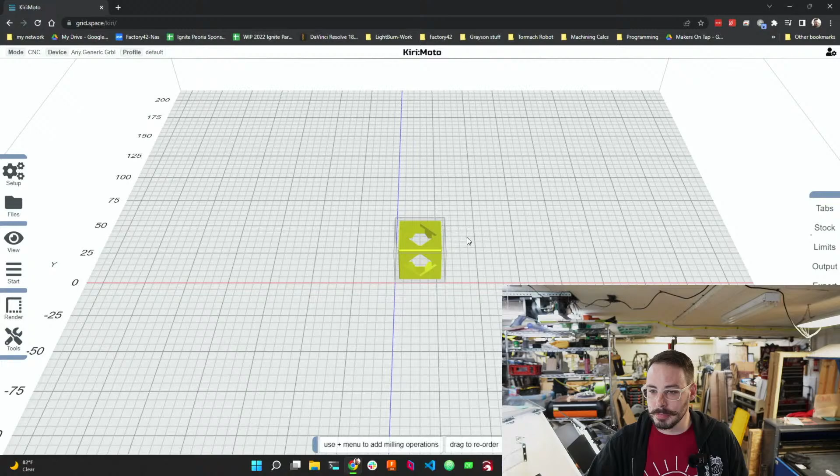I feel like Kiri:Moto is going to be a much faster stream than FreeCAD was. I don't know about you guys, but I don't feel like this one's going to take 3 hours. I hope not.

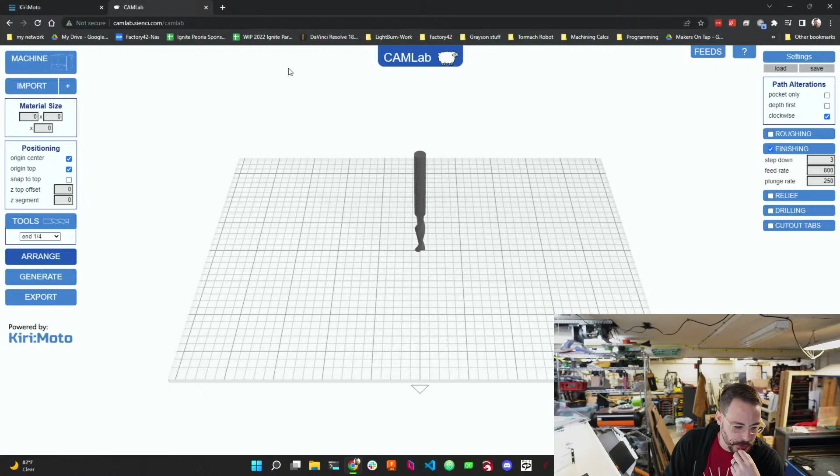Anyway, I feel like that's enough time. Let's go figure out where to start. So let's start in Kiri:Moto. The cool part about Kiri:Moto is it does all kinds of different things, right?

I have used it in the past for 3D printing, for belt printing, and it worked really, really well for that. So, hey John.

So when I first started building the milk crate, I really liked the idea of this cam and slicer software, so people could make all of their milk crate parts in here using the FDM tools, and then make all of their CNC parts in here using the cam tools. But I never got around to trying it out.

So I think we'll use the CNC mode with a generic Grbl post. The CNC Mill 1 is close, but it's not quite the right size. Hey Cam. So let's define my size.

Why can't I change? We're already off to a wonderful start, I feel like. Oh, wait, customize? My devices. Aha!

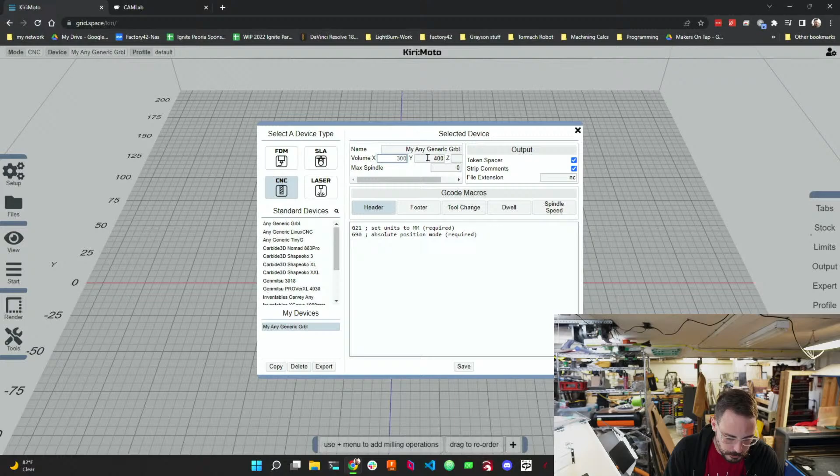I think it's 200 for the Y, and 150 for the Z seems reasonable. And our max spindle speed is 24,000. Doesn't really matter for my machine. I don't have the spindle speed controlled by the controller yet. It's all controlled in the VFD still.

And then that header seems reasonable, the footer seems reasonable. It's a good thing we like each other, right? Dwell seems reasonable. Cool, all of that seems fine. NC for the file extensions, fine. Okay.

So it gives us this - whoa. Whoa, well, that's an interesting way of doing things. I mean, this is reasonable, I guess.

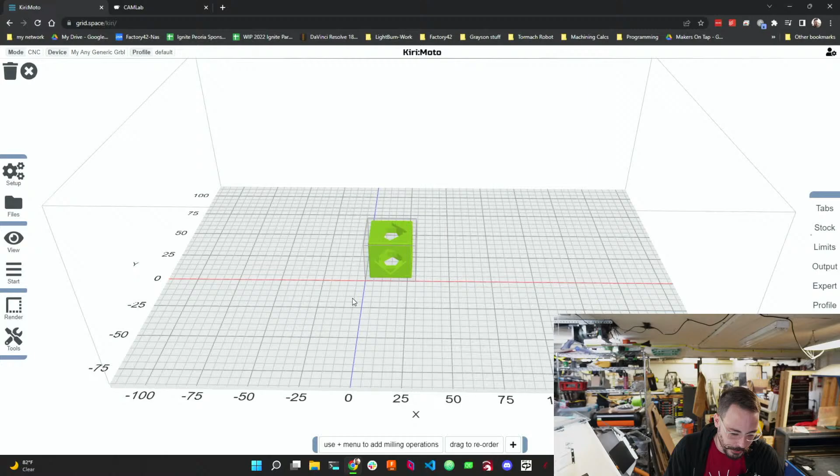So if I had to guess, our work origin is the intersection here, this 0 and 0, and we define where that ends up by dragging the part around in the workspace. That's interesting. All right, so I'm going to delete that. I'll import as cam.

Interesting. Make a new folder for Kiri:Moto. Okay, you guys get to look at me for a second while I look around in my computer for where the parts are, because I thought they were all in here, and they're not. Here they are. Okay. Now you get me again.

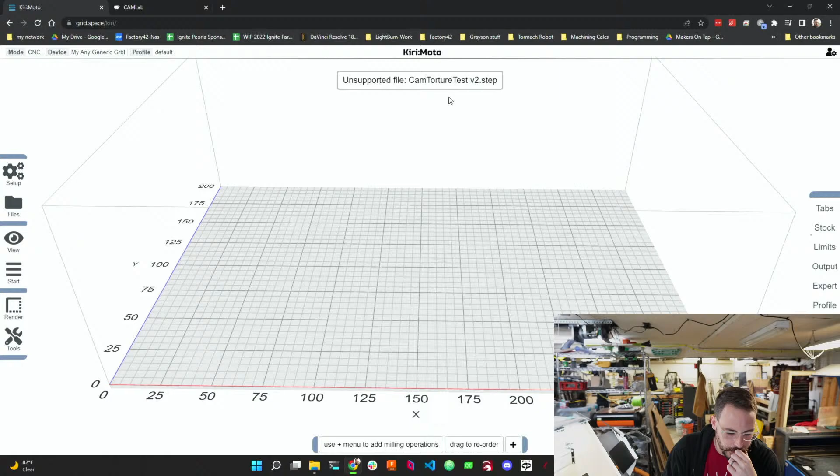Okay, so to start, let's see if we can just drag. Unsupported file. Okay. Can we do an unsupported file? Unsupported file. All right. We are off to a fantastic start. I thought I created an STL. Let's go back to, sure, you can look at the machine for a second. Firmware. That's a terrible UX. Yeah, all files. Like, okay.

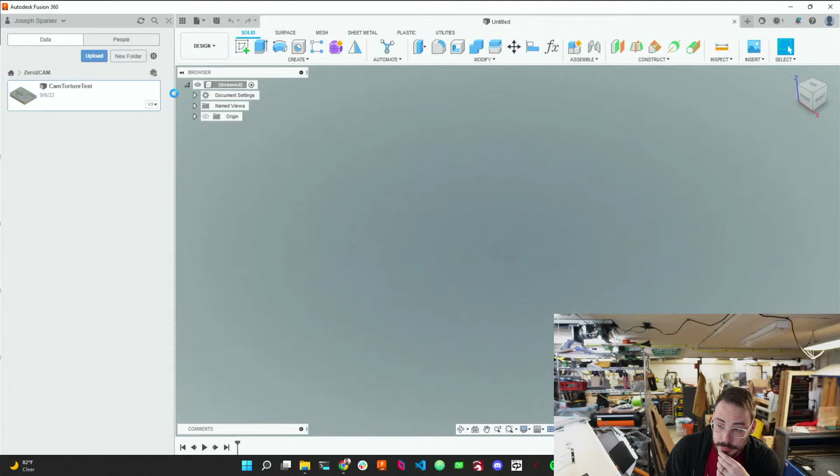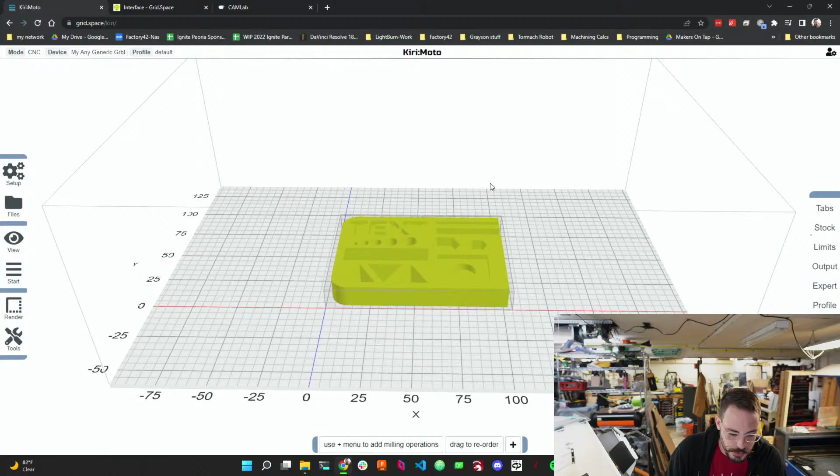Now we get to go to Fusion and I really didn't think this was just going to be just STLs. But sure, why not? I'm really curious. I bet if we go here, OBJ, 3MF. Huh. Okay, so it literally supports all the things that I didn't export. So SVG, I don't have a 2D SVG of it. I could create one really quick. But we're not going to do that right now because we have an STL, and the STLs apparently work. Okay.

So one of the things that turned me away from the software initially was it seemed like it used like a tracing methodology to cut everything out, where it just kind of goes back and forth. And I'm really hoping that's not the case, and I just missed something before. So let's, any holes? Okay, so it does look like it's done. They have done things that I didn't know before. Okay.

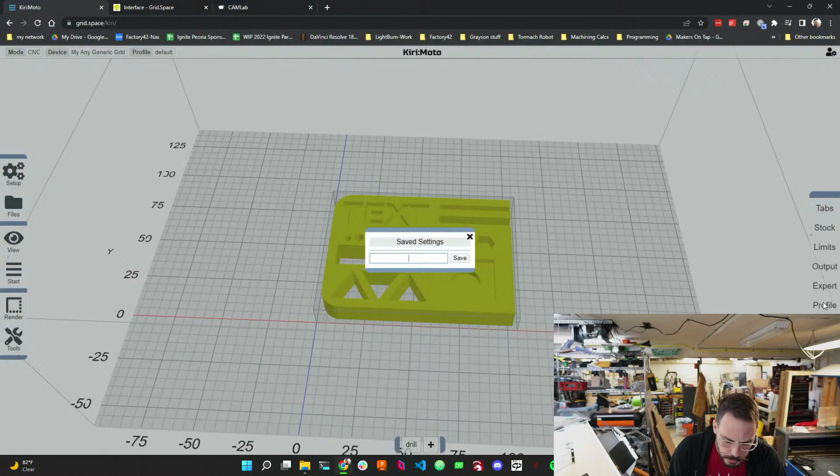Oh my god. Step down. Okay. I want 0 dwell. Yes, Eric. But, you know, little control makes it less overwhelming for people, right? So if we're going for beginner-friendly software, this might be interesting. Okay, so this step down, this might turn into pecks. I don't hate that. A 5mm peck is too much. If we're going to peck it, we'll do a 3mm. Okay.

Now, let's try follow selected features with a specified tool, often used for lettering and engraving. Okay. So we want an 1/8 inch end mill again, 18,000 RPMs, just because it makes me feel better. Feed rate. Hey, Jason. I can't remember what feed rate I ended up using last time. Does anyone know what 80 inches a minute is in millimeters per whatever this is? Since it doesn't seem to give me units.

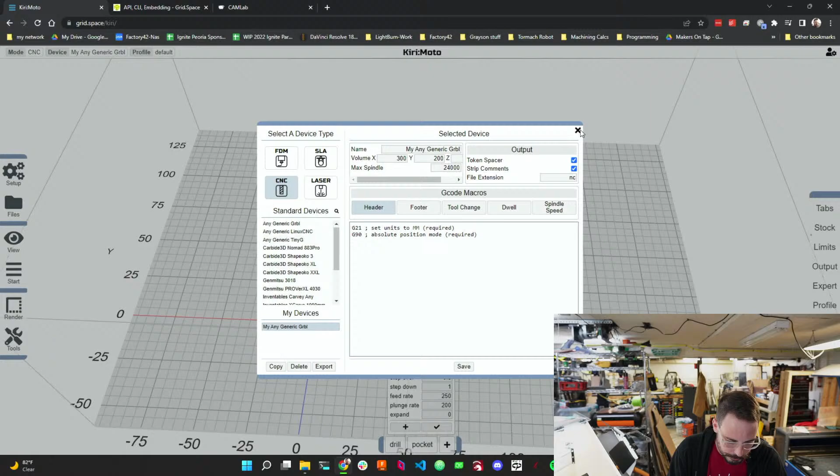Hey, Mitch. Okay, so the question is, is this millimeters per minute or millimeters per second? And it doesn't give us any information towards that. Nobody reads. Nobody reads. Okay. Well, 1,000, step over, step down. We'll do a 4mm step down with a 2mm step over.

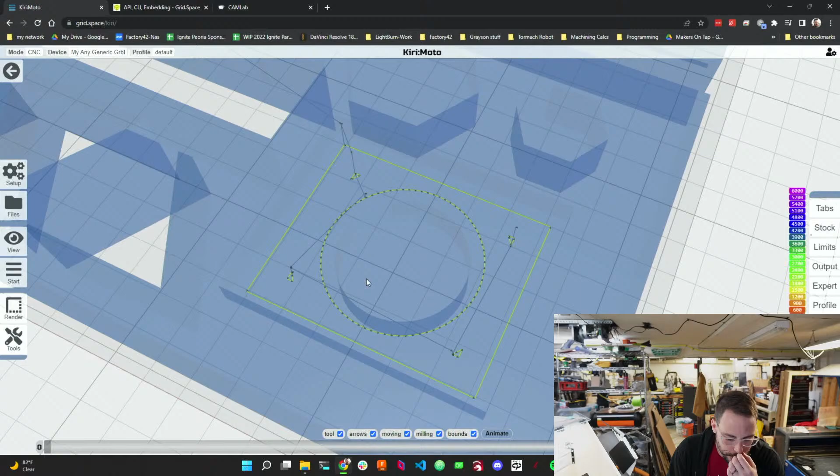Ooh, okay, so we can... Okay. So it's thinking about it. Hey Nate. Okay, so this is way better than I remember it. I'm not sure it's doing exactly what I want it to, but yeah, I think it's kind of doing it. Interesting. Animate? Okay. So it's doing some plungy drill stuff. Ooh, and it gives you a cutaway representation. That's fun.

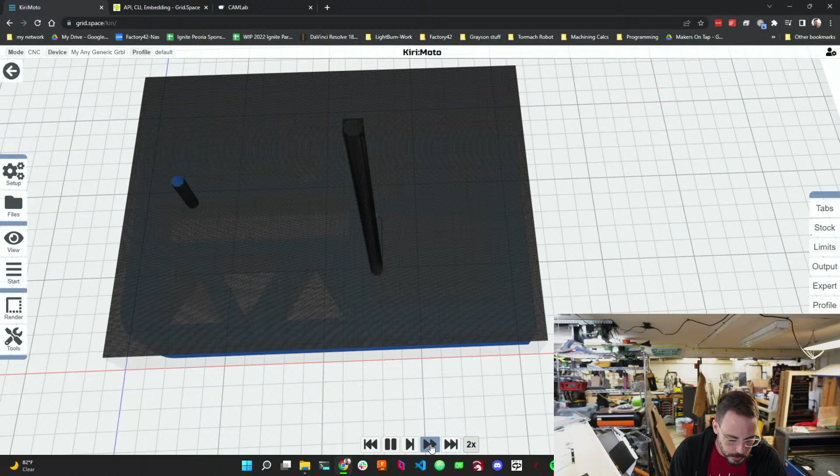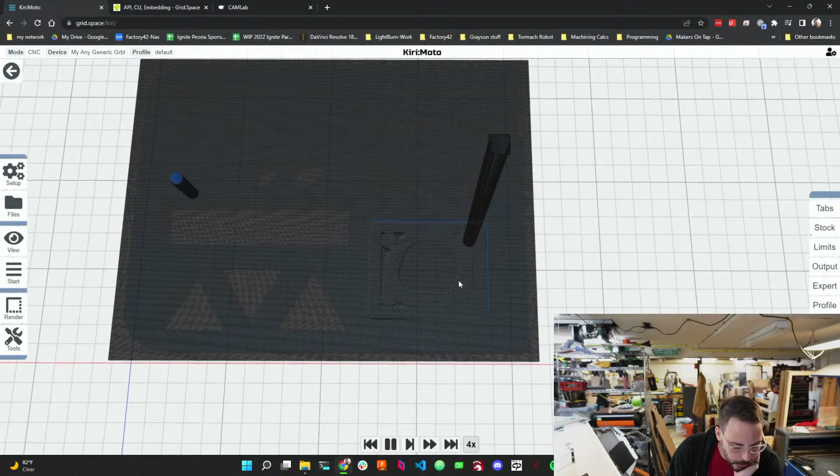Okay, so it's doing an outside pass, and then an inside pass, and it does some wiggles. Okay, but it leaves a bunch of crap behind. Less... Yeah, John, this is significantly better than I remember it. Let's see. Let's go back in here, go here. And then we'll do that preview again. Okay, so now I wonder, I had it set to 2 before? I bet it's a percentage of the mill.

Yeah. Oh, it models the bit getting broken. Kinda. Okay, so this is better. This is more useful.

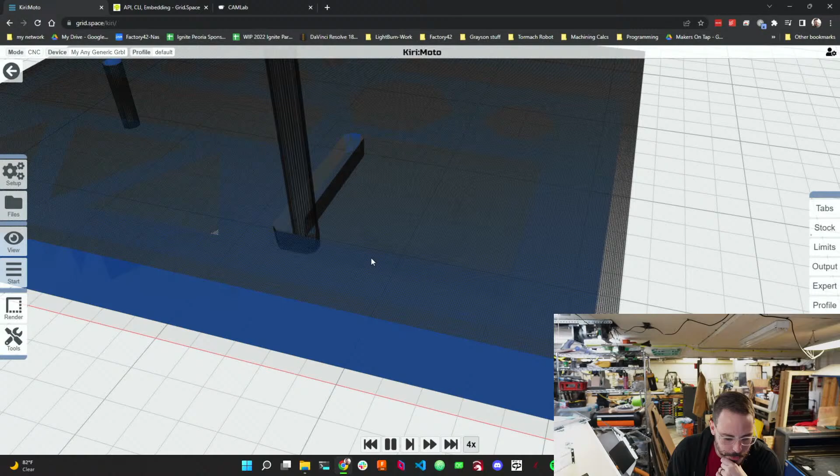I'm curious what made that portion of the stock remove. Okay, so it's actually hitting stock during a travel move. So their path planning leaves something to be desired. Let's maybe not use Kiri:Moto for metal machining. A wood router, like these travel moves, that wouldn't matter at all. But in aluminum, yes, it would model your bit getting broken, Oren.

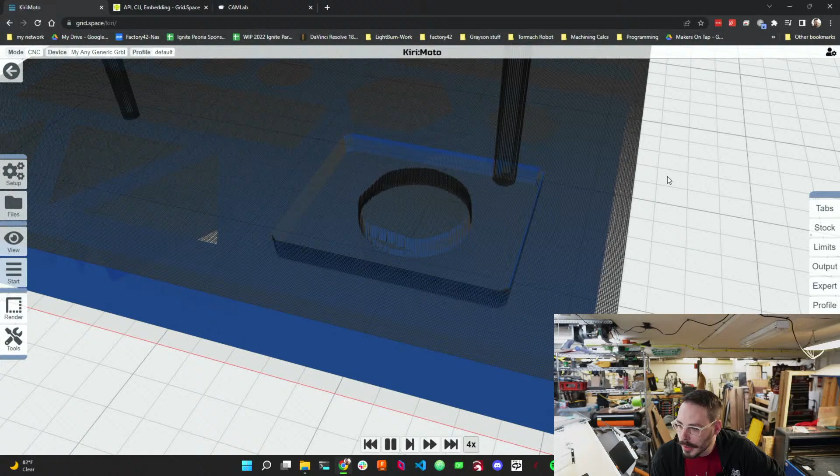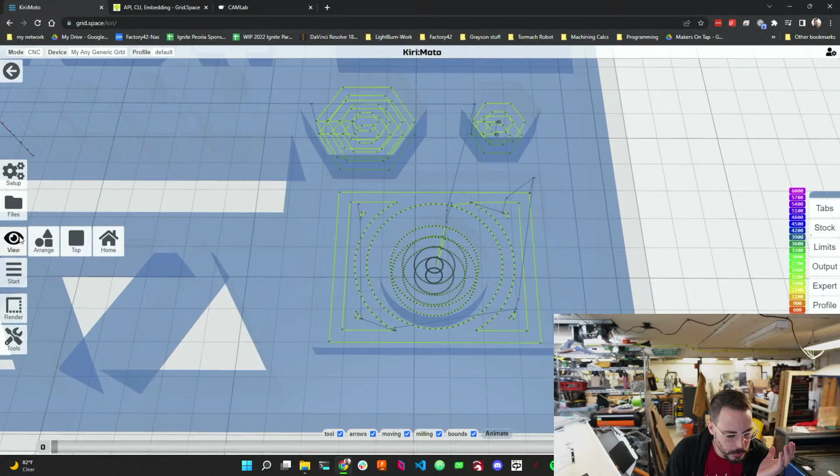Yeah. Yes, I had it set as 2 before, thinking it was millimeters and not a percentage. So that's totally reasonable. All right. Now I wonder if I can do that and hit all of those in the same pass. That would be kind of cool. Oh. Okay. We'll animate it. We'll bump it up to 8x so it's a little faster to see. Okay, this is pretty usable.

Huh. Now we're going back in, cleaning up that stock. Okay. Not mad about that. That's pretty good. Let's see. Let's do... What is it? Clean up. Okay, what does roughing do? Yes, it is another anything but metric, I think. Remove an area of material inside. Okay, why do they have a rough that is sometimes called pocketing and a pocket?

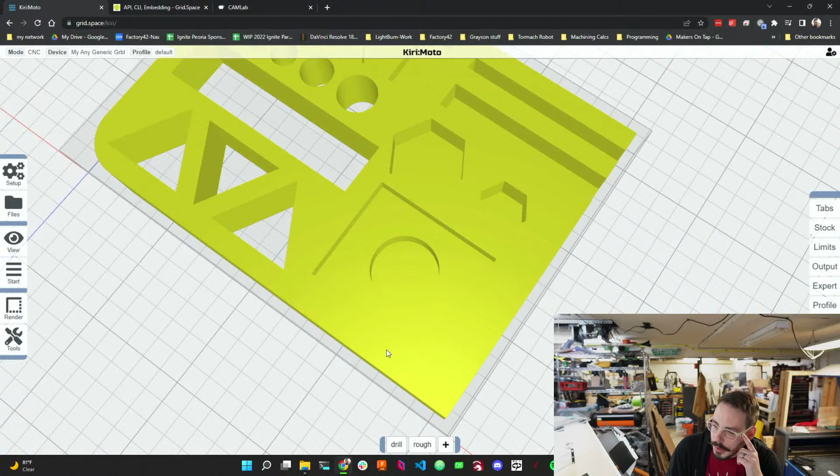Yes, full send. Well, the workspace units thing's interesting. We used to have a guy that I worked with that would randomly switch the mill that everybody in the shop used. Everybody except for him used inches for their machining, and he would switch it over to metric when he would work on personal projects at night. And it was always a problem because the tool table would switch to metric, and multiple times we smashed tools because it would rapid through things because of workspace units changing. It was not good.

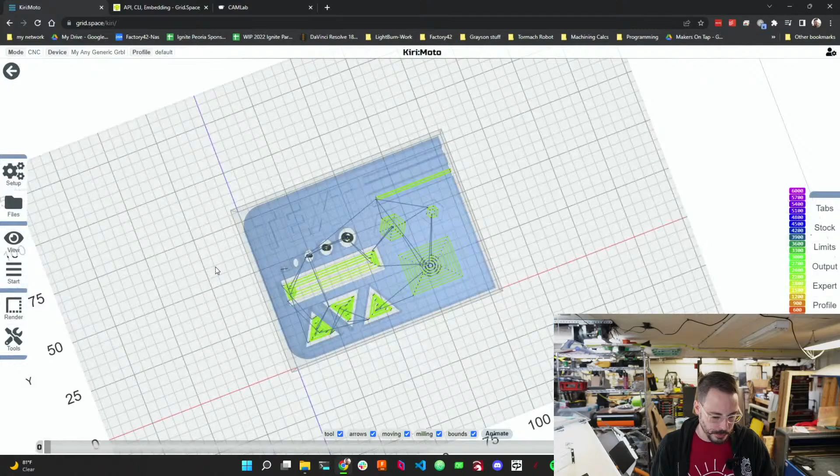So clear top, is that a facing op? Clear top. Yeah. I think that is a facing op. So let's see. Yeah, okay. So roughing is going to attack everything, which, you know, I guess that's handy. It left some things out. Like it didn't get the text, it didn't get this slot, it didn't get this hole, which totally is big enough to fit the end mill. There it goes. Right click is pan. But it did a fine job.

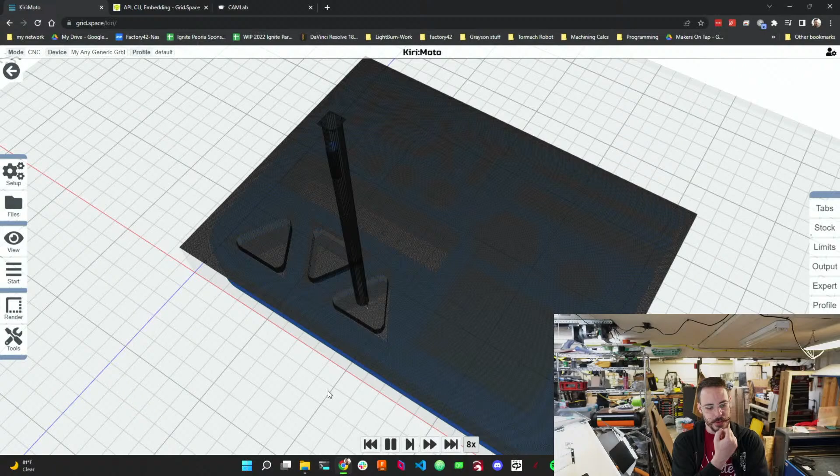And all of these have stock to leave on, so we'll bump this. Okay. We'll bump that up to 8x. Okay, so it's ordering by depth. It's basically treating this like a 3D printer, so it's only going down depth per pass, not ordered by operation. Okay. That's actually pretty useful. I'm not going to let this finish because this is going to take forever. So let's get rid of that really quick.

What is level? Distance from stock face for leveling pass. Okay, so level is a facing op. Preview. Yeah. Okay. So that's definitely useful. We'll clear that out. Outline. Dog bones.

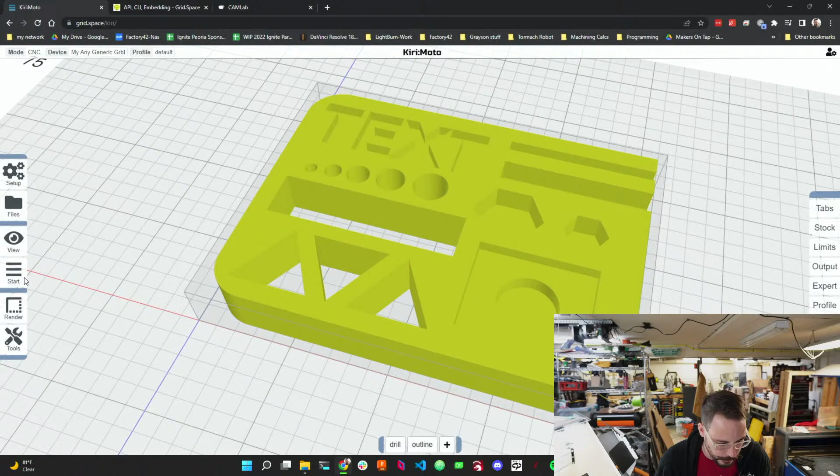This is a useful tool. Let's see what this does, because I'm just real curious now. I'm not even gonna mess with feed rates for some of this stuff. Okay, so if you look at it, all of these have 2 passes. Yeah, so it's doing an outside pass that's basically like a clearing pass, and then it takes the thinner material as a finish pass. This is great.

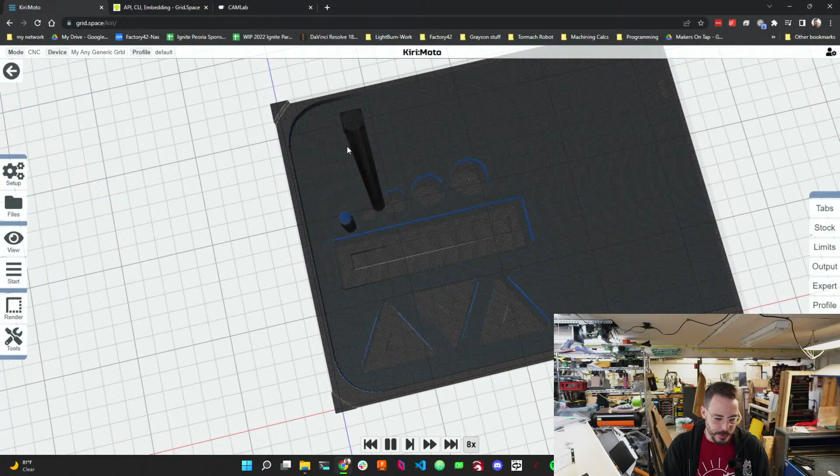You know, it ignored some things that I feel like it shouldn't have. But that's why we have previews. Okay. So it's treating these inner features differently. It's cutting on the finished side, and then it's cutting, which is the opposite of what I would want. I would want it to attack it like it did this outside, where it made the roughing pass outside and then takes off a minimal amount of material close to the finished part.

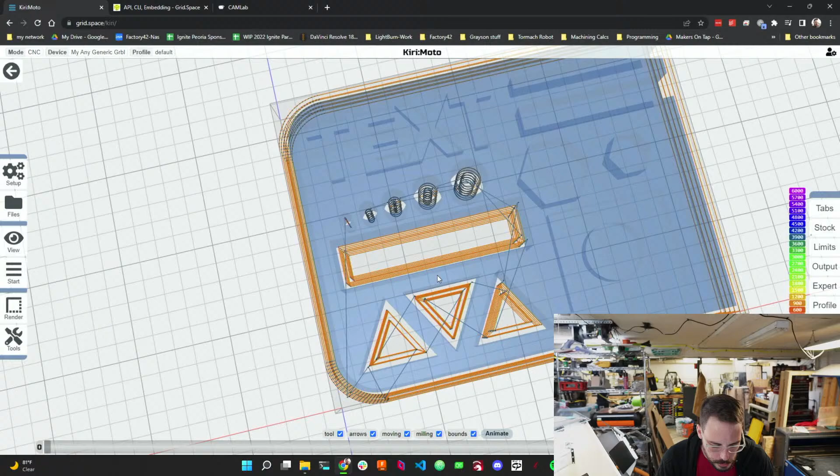So let's stop this. Outside only. It doesn't look like we have a good way of changing that. If we omit through holes. Okay. Can we give this tabs? If we re-preview it, nice. Okay, so this respects the tabs. Neat. Huh. I'll take it.

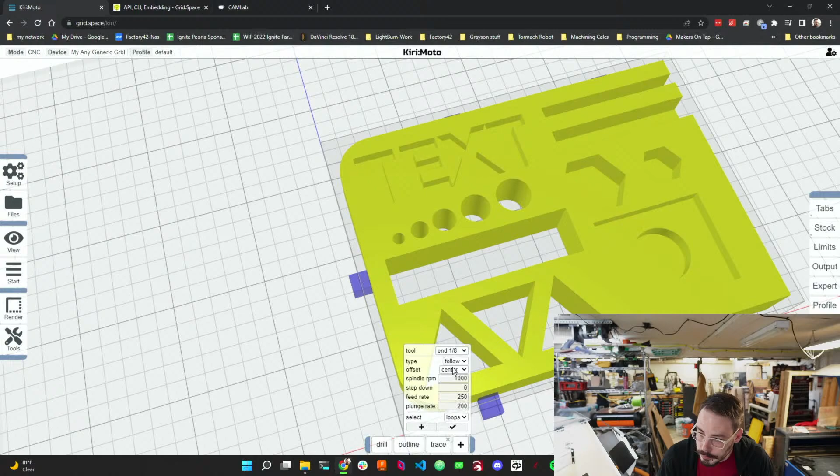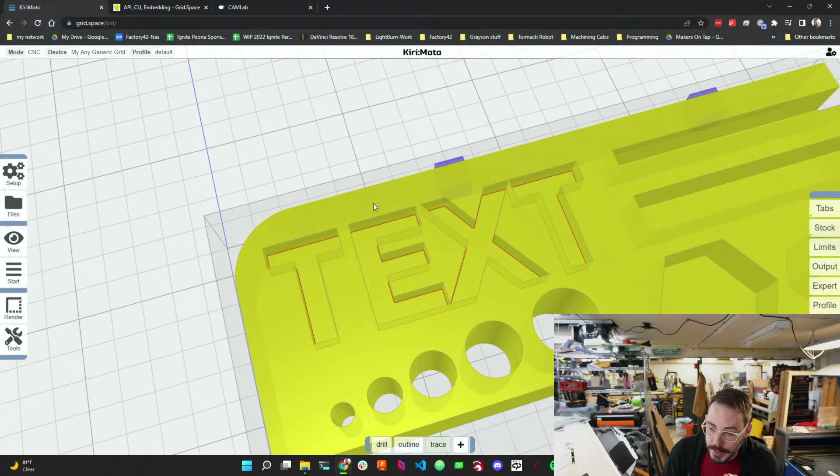All right, let's do the trace. Now, FreeCAD really didn't like text. Follow, offset center. Okay. Loops and lines. Let's see what it does. If you guys remember from the FreeCAD version, the X crossed into the E and the T. Yeah, that tab system, that's pretty usable. I wish they were triangle, but I think they'll work.

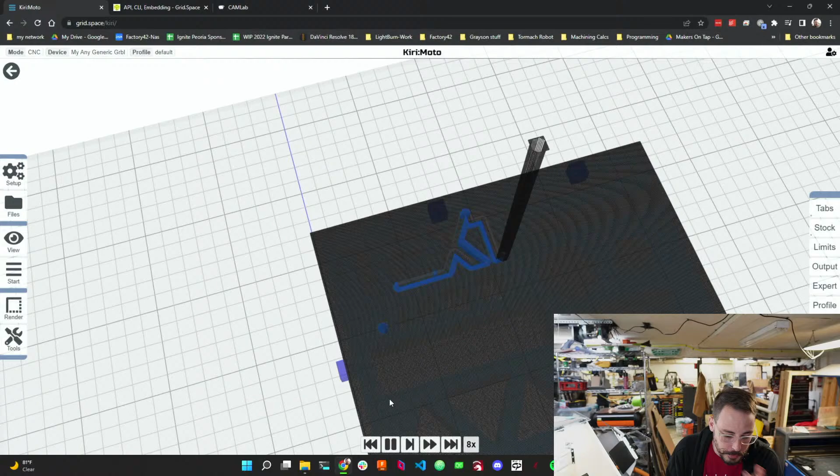Let's see what it does for the text. Oh, okay, so I had set the text to be, okay. So if we animate that, boy, I wish I could make that go faster. Yeah, what we could do, I think we can drag and reorder these. We can. That's nice and intuitive. I like that. Handy. Okay, so this is obviously not what we want, but it is cool.

So let's go back into trace, do the offset on the inside. And it looks like it did exactly what I hoped, which is ignore the width of the pocket and just let the tool do its job. Normally I wouldn't like that, but if we're just tracing a text outline, that's cool. That will work.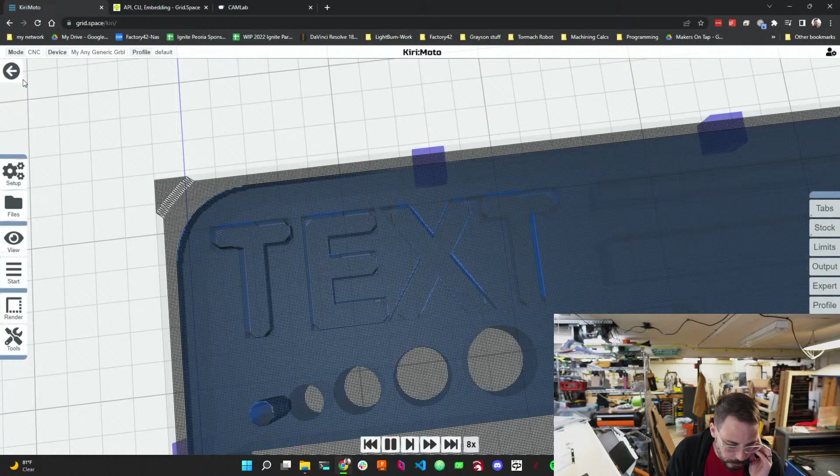Let's see. So the other difficult feature that I added in this is this slot, which is exactly 1/8 inch wide, and I think that trace feature will be perfect for that. I wanted to try pocket for it. Yep, that will work. Oh, and it kept all the features that I wanted. Why did those go away? Oh, okay. We'll drag this guy over so we can see it first.

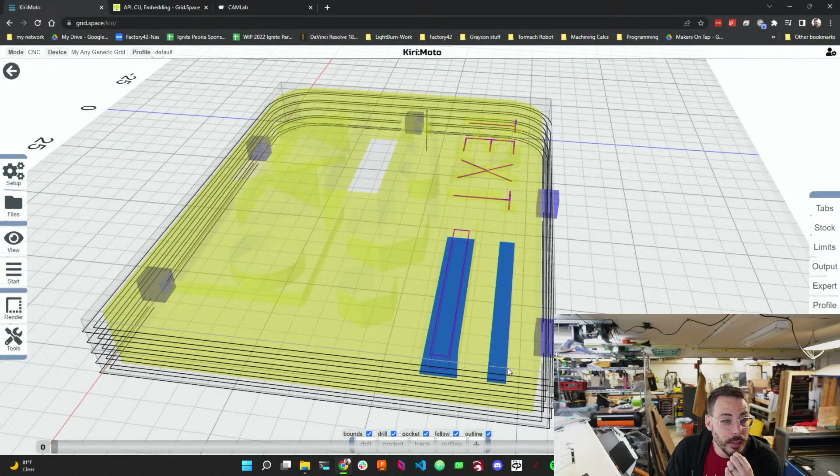Okay, so the pocket did not generate for the 1/8 inch slot, which, no, it's picking up. Which is quite good. I'm curious though, because I don't think I animated that to see if it was lifting through the tabs. So let's see.

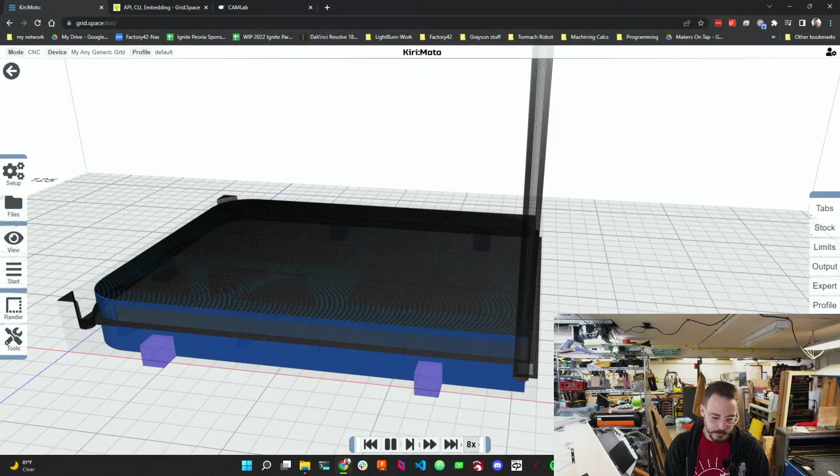So what do you guys think so far? Would you use this to make stuff over whatever you're currently using? Some of this is pretty cool. I really like, anyway, it leaves that nice stock generation.

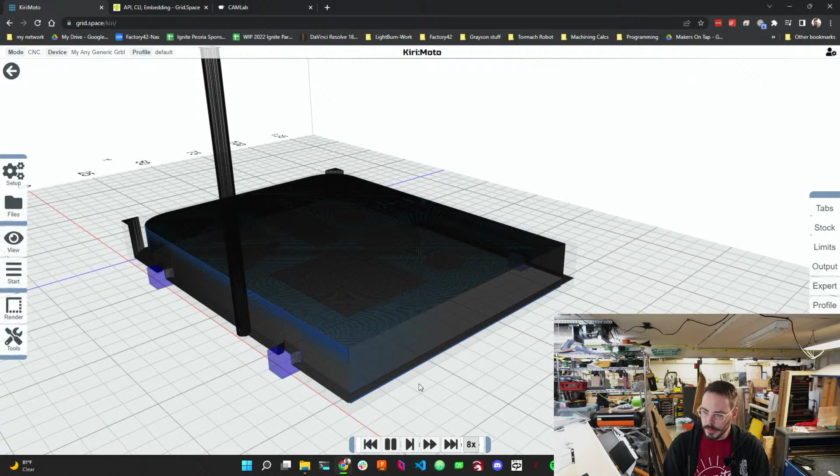Oh, wait. Yeah, it lifted over the tab. Oh, it's treating it as two separate paths. Okay. Interesting. Not what I expected. Not at all. Yeah, that's exactly how I did the text in Fusion. Eric just defined the tool slightly small. Okay.

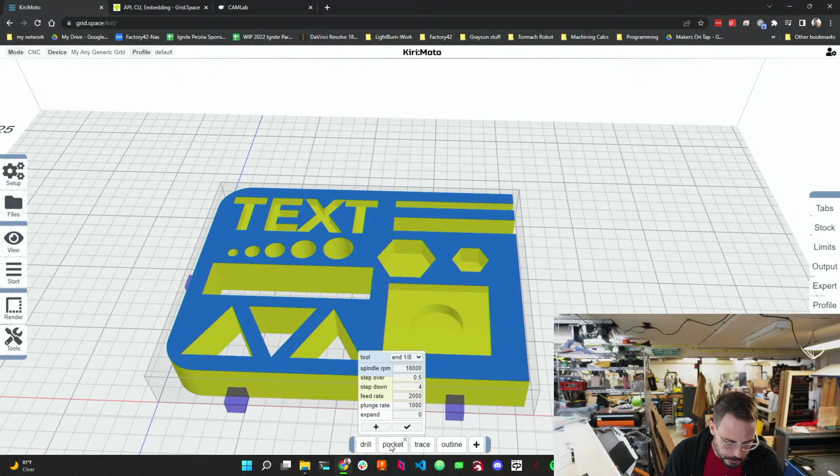Let's see, what else did we need to do? So we did the outline of the cutout, the trace for text, the pocket. Oh, okay, yep. So the pocket didn't define that right. Oh, that's annoying. We can only have one of each operation. Huh. I think I broke it.

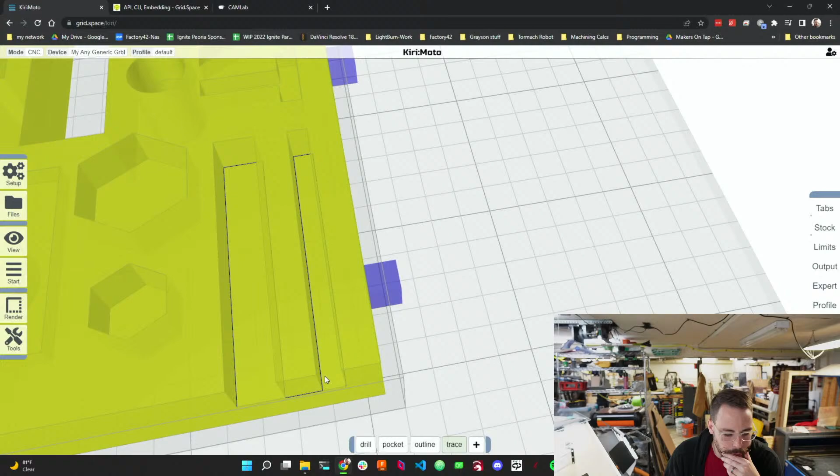Trace, select. Whoa, whoa, whoa. Don't try to pan by clicking middle mouse. That's a bad move. That is not doing what I want. Yeah.

So occasionally, you know, you have to fake CAM out to make it do what you want it to, like model a specific sketch into something to follow stuff. Yeah, having to refresh my CAM is not something I've ever had to do before. So the problem with redefining the tool diameter, Eric, is I don't see anywhere where you can define a tool.

Origins. Oh. What is ease down? Oh. Well, we're going to play with that. I can't imagine ever using conventional on a router.

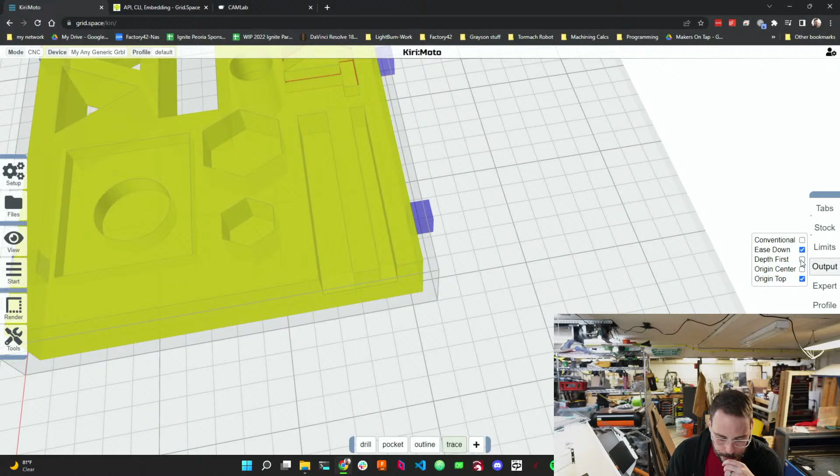Okay. So earlier we saw it doing order by depth, where it was going through and doing everything per pass. That's kind of neat. Origins. Reference from the center. The top of objects. Left under setup.

Look at you, John. Look at you, pointing me in the right direction.

Ball mill, taper mill. Interesting. So I actually, in preparation for this, I got a whole bunch of different sizes of taper mills because I kind of wondered if I was going to end up doing the whole waterline machining thing and needing a taper mill. Cool. Taper mill. Just for funsies.

Flute diameter. Oh, I think they're like 1 inch. And 2.5. Okay, neat. Yeah, apparently I do have to create more tools in the library. Didn't know where that was.

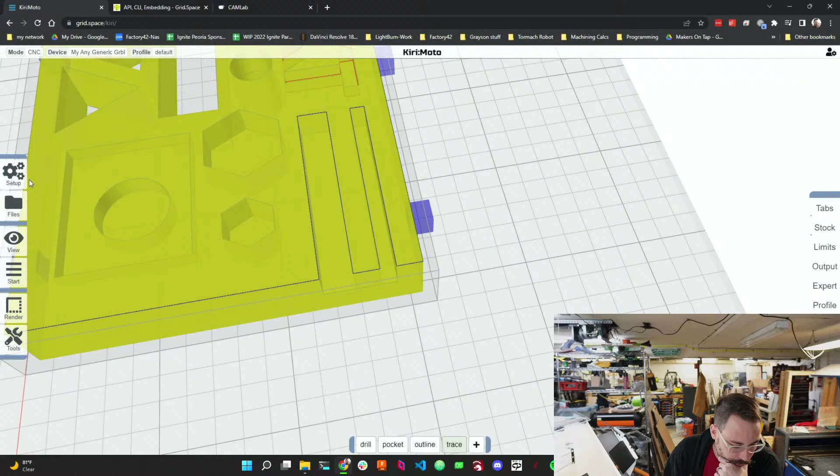Ooh, there's a dark... Oh, I like dark mode. Code preview, that's neat. Let's do the code preview. I'm interested in these grid host things. We're not messing with that tonight, though. What does experimental do? Let's see what that does. Screw it.

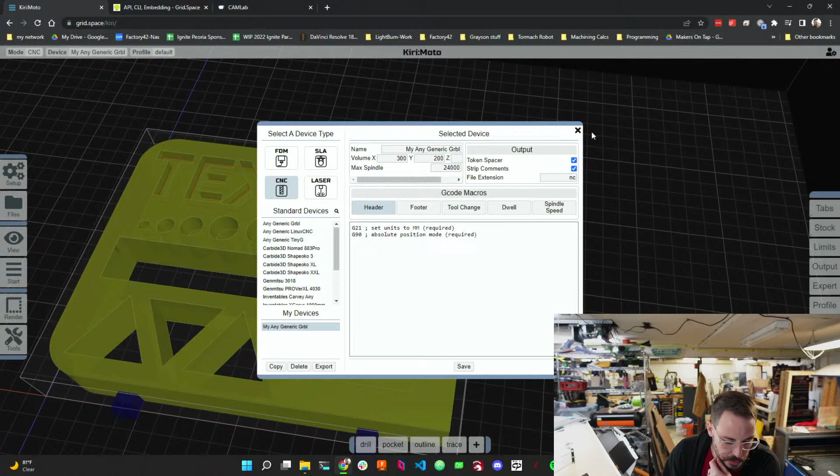I'm pretty sure it's in millimeters. Yeah, G21's in millimeters. The part was designed in millimeters, and the part came in looking like it was right. I suppose I should take a second and make sure that's what I think it is. Yes, millimeters. Okay.

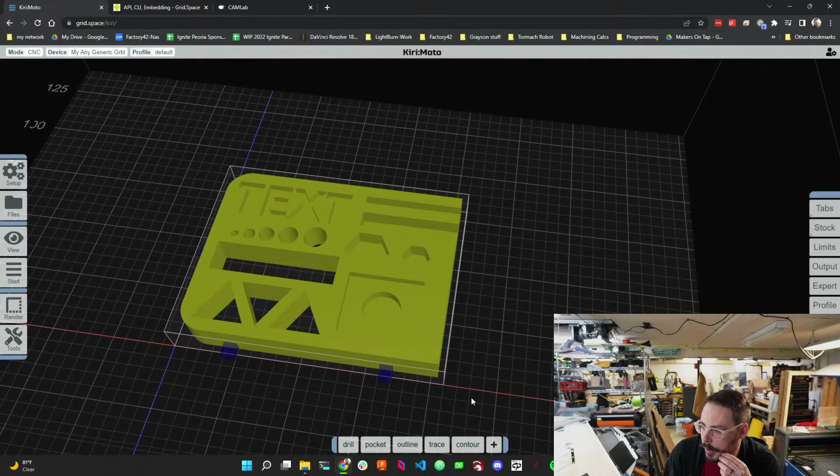Contour. Oh, so this contour pass, I know what this is. Contour pass is the trace thing that I was talking about earlier. Is there an animate adjustment? Like a speed adjustment, Rick? Or... I'm not understanding. Yeah, so this stuff where it's just tracing back and forth, this is what I remember Kiri Moto only doing.

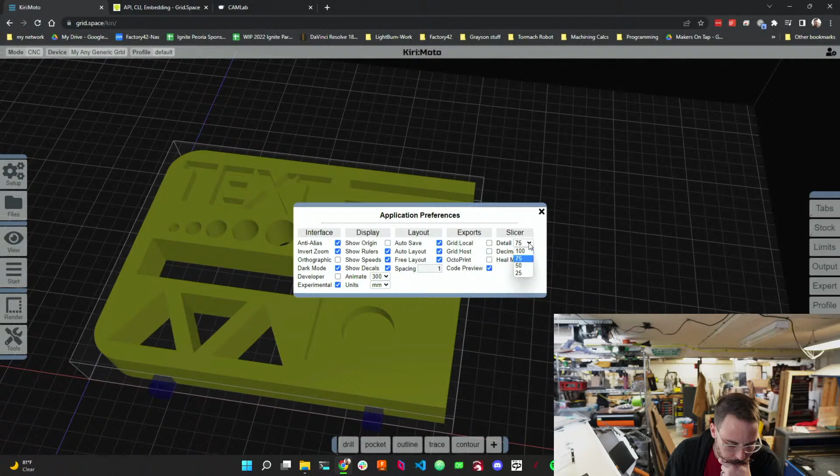Higher is more dense. So we're not going to run that. Flip register. Oh, hey, let me do 2 operations. Neat.

So if that's going to work, you know what we could do? So we go in here, go to tools. We'll make a second end mill. We'll call it small 1/8. We'll make it 1/8, so it defines right. 1/8. One. Save. Done.

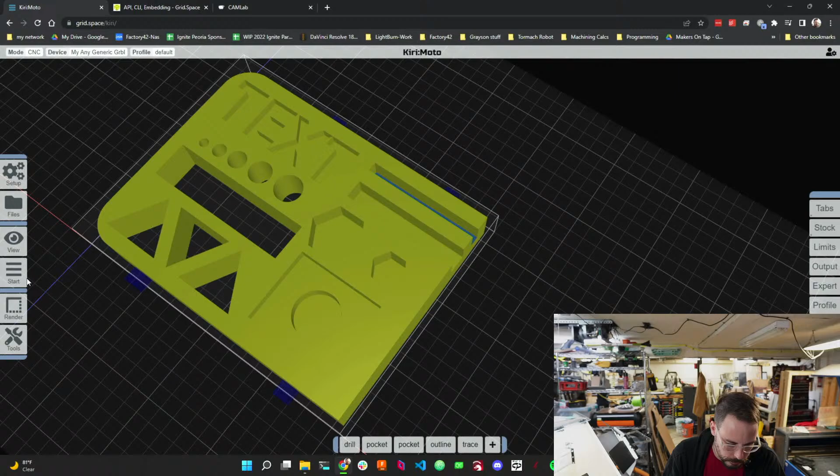Okay. Look at that. It did the thing. You know, that's probably not the right way to do it, but it did work. So, going with it for right now. I'd like to wrap this up soon. Okay.

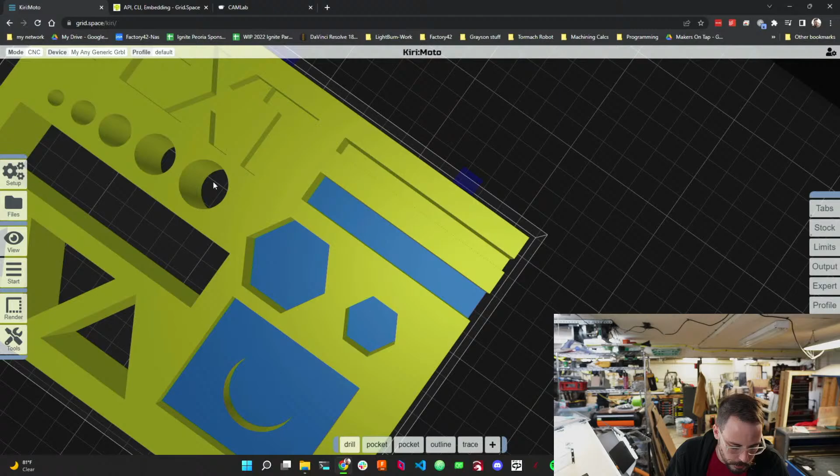What I'm really curious about is, can I... It doesn't appear that I can go these through holes. So... remove an area of material inside of... I feel like I missed something in this operation. Oh! Have I just done all of the operations it can do?

Nope, it just freaks out after a little bit and you gotta refresh. Okay, nothing tells me I should feel good about this, like having to refresh things.

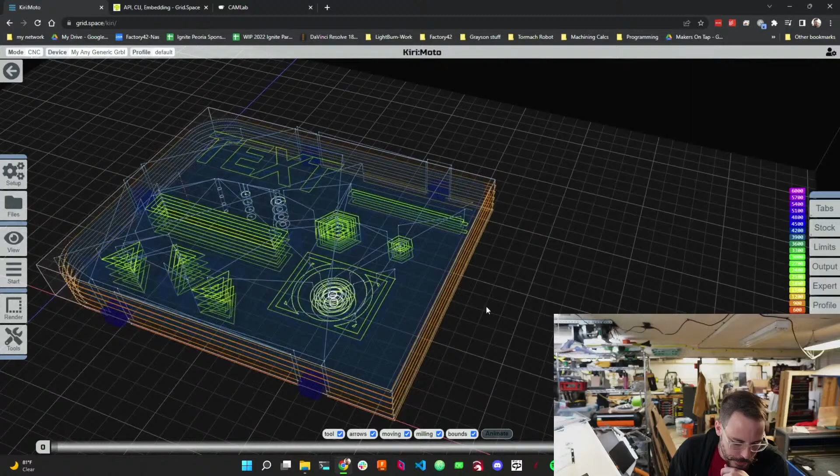Okay, so boy, I really like the way this preview looks now that it's in dark mode. It looks so much cooler. It's still not getting this hole, even in the rough mode.

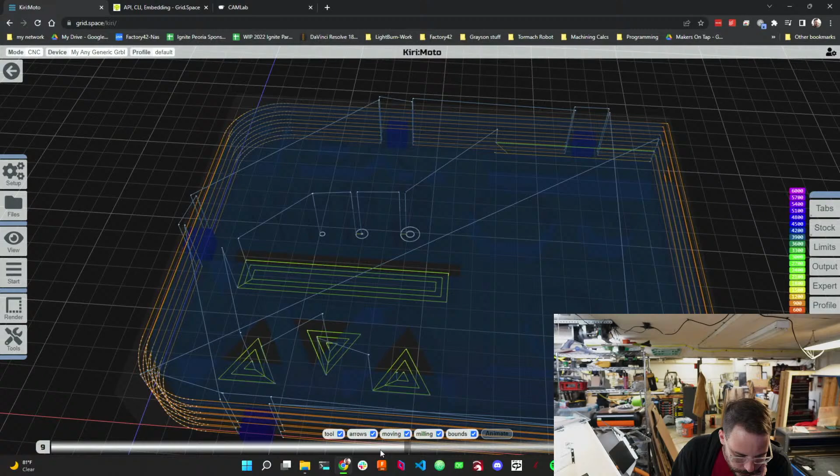Let's see what this does. So we did inside only, and I let it dog bone. Okay. Oh, what is this doing? Oh, it's got a cool slider. Neat. Okay, so it's doing stuff I don't want it to do, like tracing the outside of the text, even though it's already done the inside.

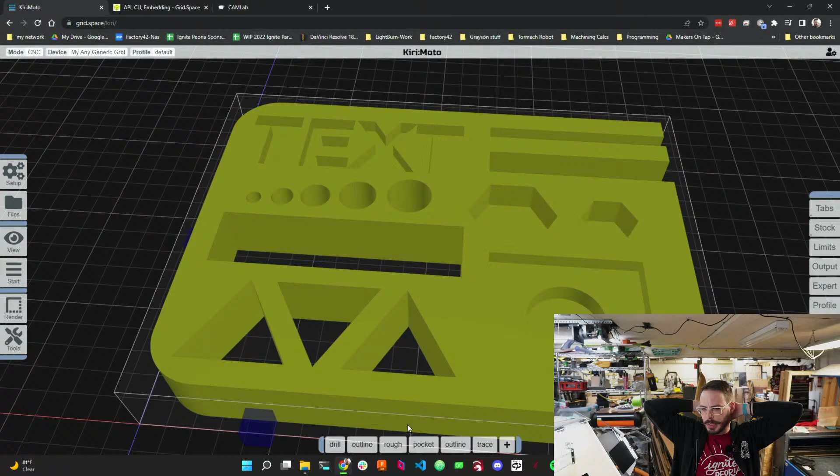Well, I kind of want to just run it and see what happens. I feel like I'm out of things to try. It definitely doesn't have the control I would want for a complicated part. And this part's pretty complicated by design. But I haven't seen it do anything that's destructive. So what do you guys think? Cut it?

Send it. Thanks, John. I appreciate it. All right. So the next step is like, yeah, it got the far left hole, but it, you know, it didn't. It's like tracing the outside of the text too. So,

limits. Z anchor controls the position of the part when stock exceeds part Z. Okay. Offset from bottom of part. Okay, so that is where the part lives in my machine.

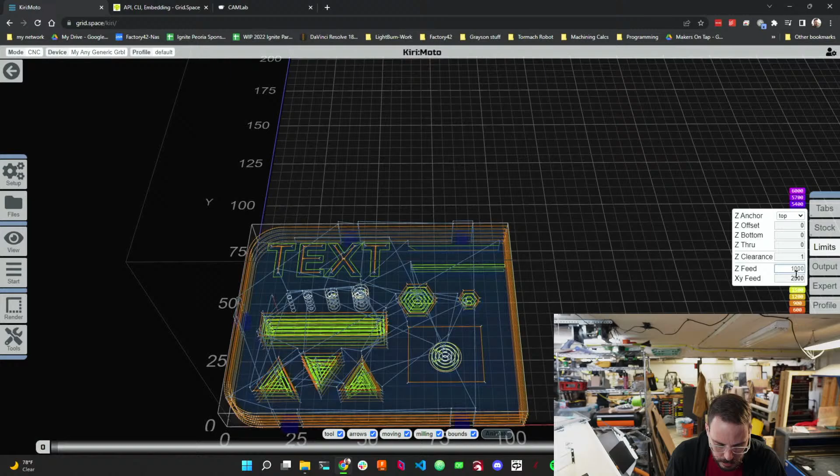And I definitely don't want 6,000 because that's really fast. Let's do 2,500. And we'll do 1,000 for that because that's like 40 inches per minute. That's not that fast. Some of these feed rates don't seem right. So, yeah, G0 is controller max.

This is a good example of, like, no matter what the preview looks like, always check your code kind of thing. That was something that always bit me when I was programming on big scary machines that cost more than my house. And we have 2 outlines there. Let's look at those really quick.

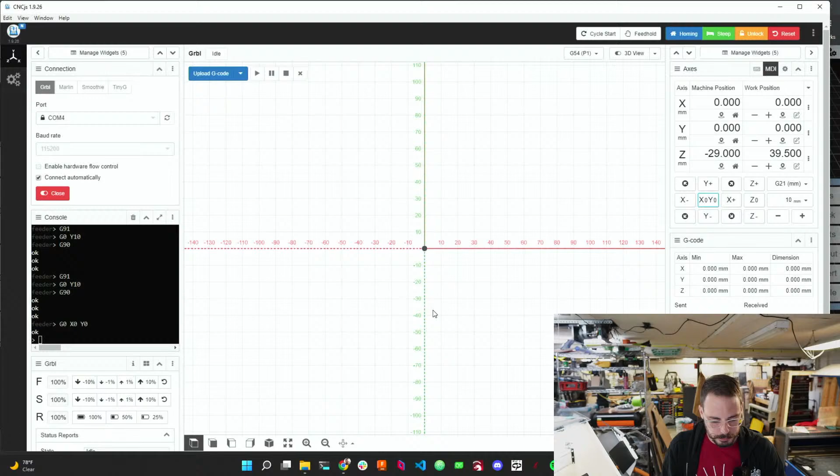Just because then it doesn't matter what the part I'm putting in. I don't have to change Z0, but I didn't see a way to pick the waste board as Z0 in Kiri Moto. So I need to go in and reset that height, which is not a big deal.

So go make that Z depth a little slower.

Yeah, that looks good. Yeah, like, you know, if we were really making a part, I'd care way more about that being perfect. And if I was doing anything other than soft plywood, I'd care way more about crashing the tool into it. But obviously, right now we're not. I'm after speed. Okay, so now we have Z0 there.

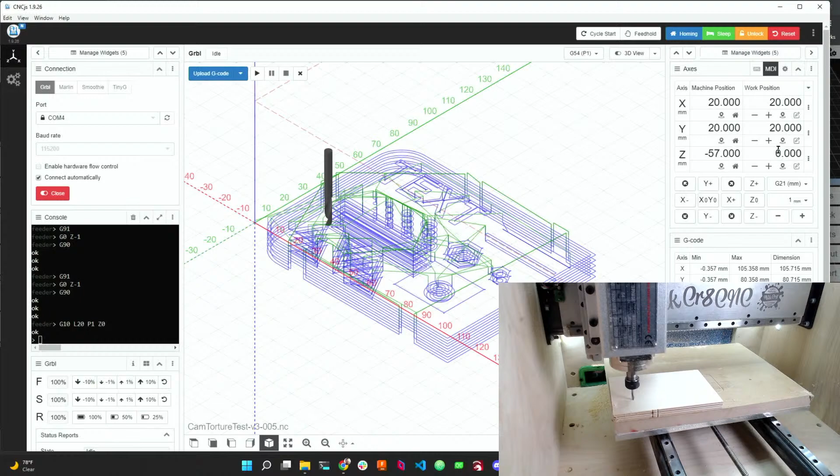Anyone know how to rotate CNCJS? I don't think you can. It's annoying.

Rotate the camera? Oh, look at that. So, you know, that is where my tool is. I really like this tool preview in CNCJS. It feels icky to say, but I actually really like this UI.

Pop that up. That tool preview is so good. Okay, so yeah, I think the only thing that's left is send it.

Are you asking why does it feel icky to say I like the tool preview or the CNCJS thing? Grbl UIs and anything written in JavaScript has always just felt icky for a really long time, and I'm finding ones I like, and I'm finding things I like.

Okay. So you can't see me, but I'm plugging in the VFD and turning the spindle on. Give the VFD a second.

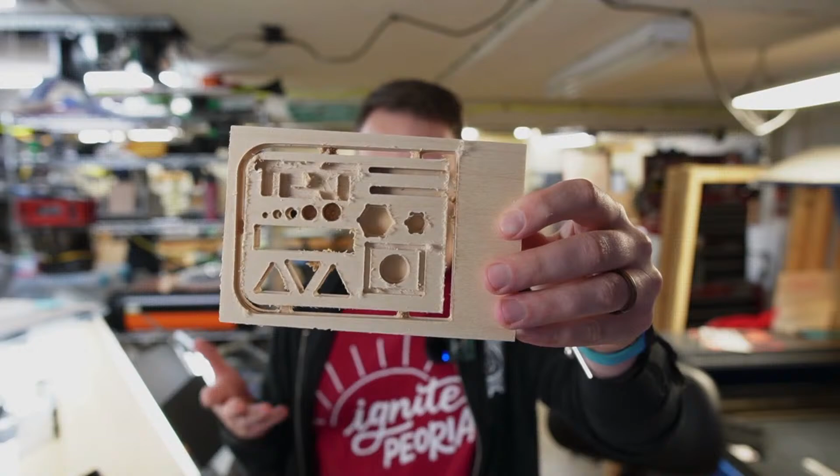I've heard really good things about the Kiri Moto development team, which is more than I can say for a lot of software stuff. So, like, yeah, for sure. Here's the part. It's not exactly what I thought it was going to be, but it is a part. The tabs worked. The cuts were relatively sane, I feel like, just going off of visual comparisons. The sizes are right. The holes line up.

That pocket's not the right size. That's supposed to be a 1/4 inch pocket. That's not a 1/4 inch. But I don't remember what end mill it. Well, I only made it 1 thou smaller, so that's definitely not right. But who knows?

So Kiri Moto, FreeCAD. Camera's freaking out. There we go. And Fusion, Kiri Moto. Yeah, none of them are perfect, but some of them are more interesting than others.

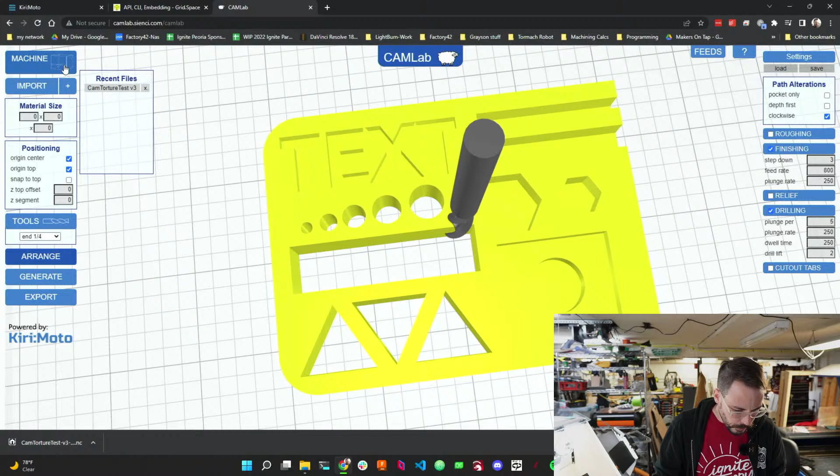Machine. Generic Grbl plus, 300, 200, save. I'm just gonna rip through this as fast as I can because we're basically doing the same stuff. I just want to see the differences. I've never spent any time with this software at all.

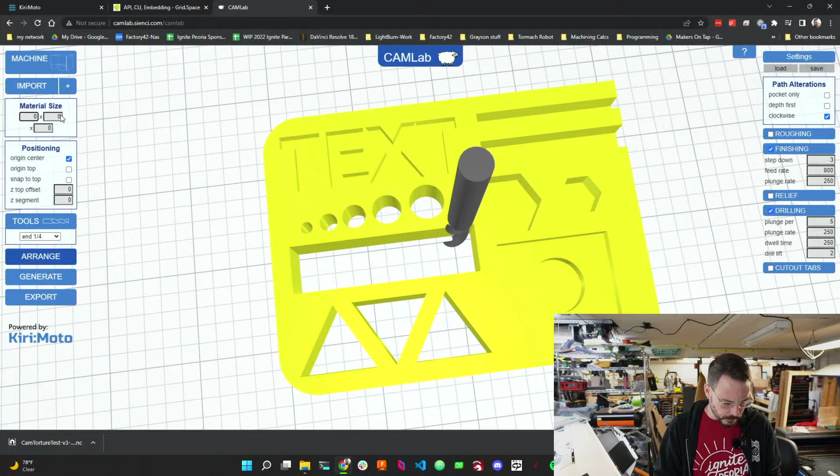Huh, okay, tools. Oh okay, so this is already more intuitive. There's this nice tool library here. We'll pick the 1/8 inch end mill. Origin top, or okay. Wait, oh okay, so we can do the origin from the bottom here. I'm already liking this better. Let's see if it can...

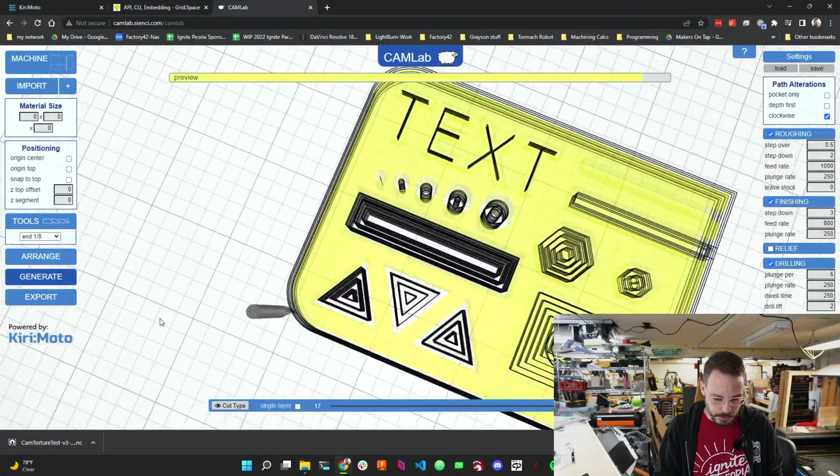Do what we need to do. Roughing. Okay. Yeah. This is rad.

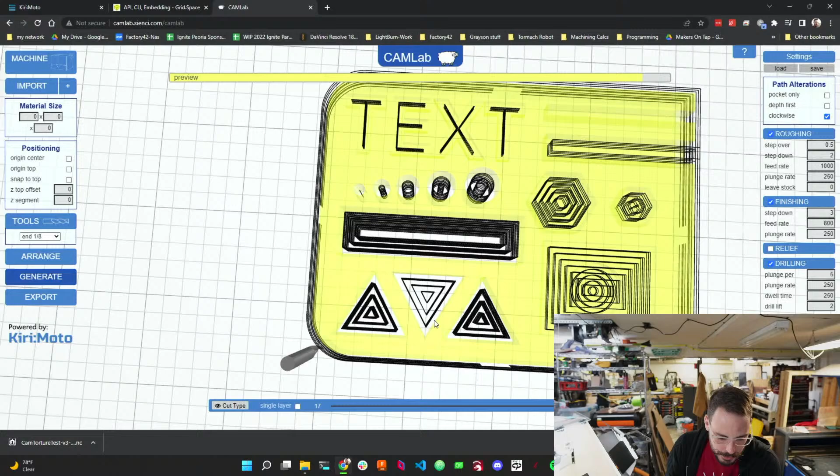I'm not gonna run this, but this is pretty cool. So a couple things about this part - this was not supposed to be a pocket. This is actually supposed to be a contour, and the little piece in the middle snaps into this piece. I don't know how to do that.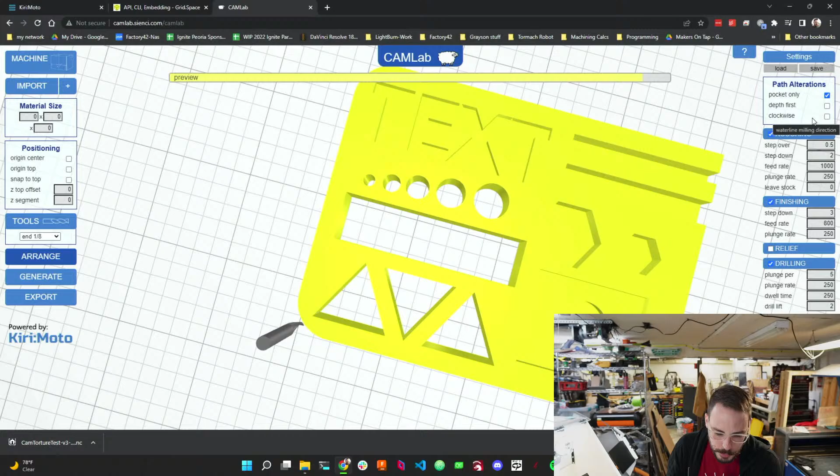I like that though. I like being able to go pocket only. Clockwise makes a lot more sense than climb or conventional cutting if you've never milled before. So can we... Oh, that's cool.

Huh, ha, okay, just showing single passes. This is super valuable. I've never seen a cam let you break it down like that before. That's real neat. I mean, not like we're just pulling stuff from 3D printing there, right?

I want to watch the tool run. Maybe we can't.

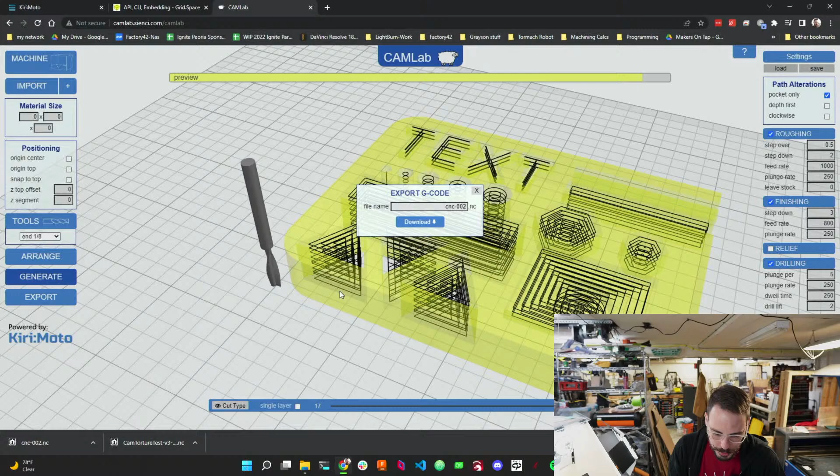Okay, so there's some things that are missing from Kiri Moto that I miss. I really liked that G-code preview. I really liked the ability to play it. So really there's no operations here. Yeah, kinda. And like you just said, Will, that was essentially what Kiri Moto did in the beginning - it just looked at the part and just reliefed it. You know, it just did this, which, you know, not ultra useful.

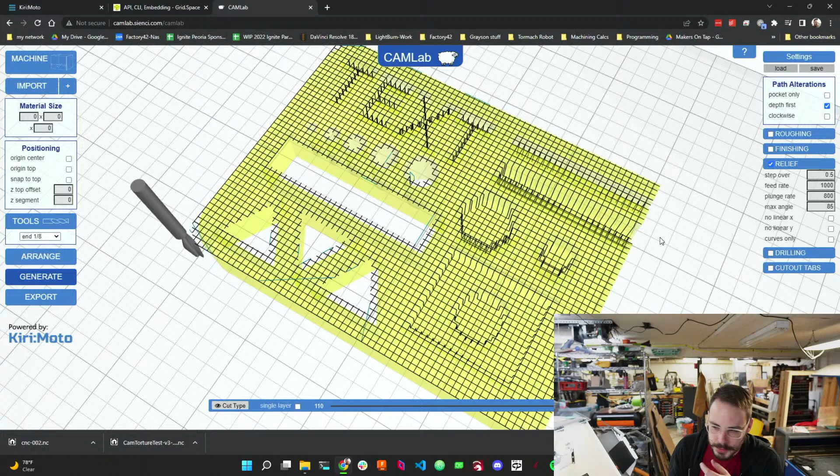Oh. So relief carving is something that I'd like to spend a little bit of time on with this machine. I don't have a handy STL on this computer, I don't think. Let me look real quick. I do. Copy. Yeah. It's just a huge STL. Whoa!

Okay, so let's scale this by 0.2. Still doesn't fit. Okay. I can't drag it around. That's annoying. Do a 1/16 inch ball mill. Whoa.

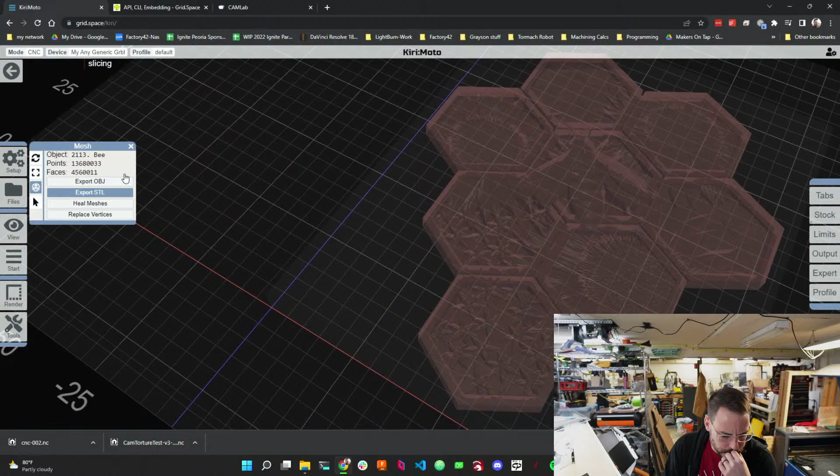Whoa. You should judge every choice I've made. They're all wrong. Years of wrong choices.

Oh good Lord, what happened? Okay, so that's interesting. I really wish we could watch that run through all of this.

I mean, it's a JWST picture. Depending on who you are, it could be not safe for work. I don't know.

So processing this is not fast. And yet everybody wants everything to always be in a browser.

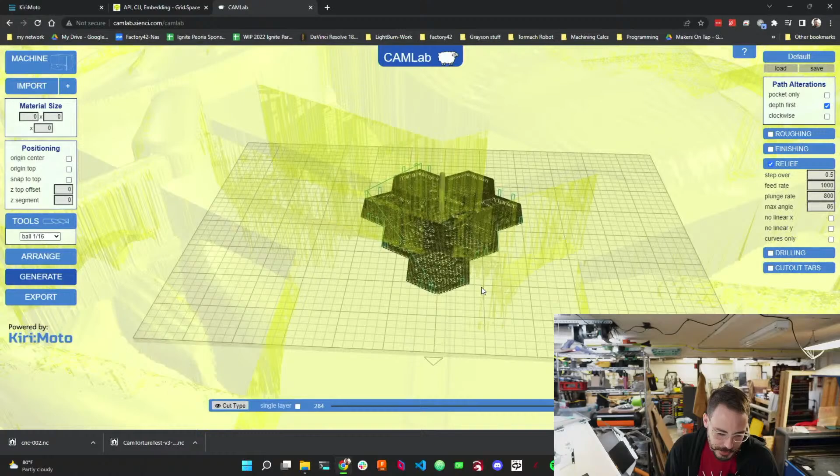I'd really like to spend some time playing with these contour tools. I've never done them before. This might not be the STL for it, or I might need to do it bigger. Or I might just need a smaller...

That's what I'm waiting on. So...

The future, yeah. So this end mill, it's a 25 thou radius taper mill. This is probably perfect for doing something like this, once it takes 9,000 years to come through.

Yeah, maybe we could rough it in with one of these others. Like rough it in with this guy, that guy, and then go fine with this guy. That might be a fun time lapse to do.

Man, there's so many more people here than I thought there were. No, Adam, we have to do everything in Rust. Somebody on Twitter said that C++ is dead and a security risk, so tomorrow we needed to start discussing moving to Rust for everything.

Oh my gosh, okay, so I'm still waiting on Kiri Moto to figure out what it's doing. Yeah, this is the Sony ZV-E10.

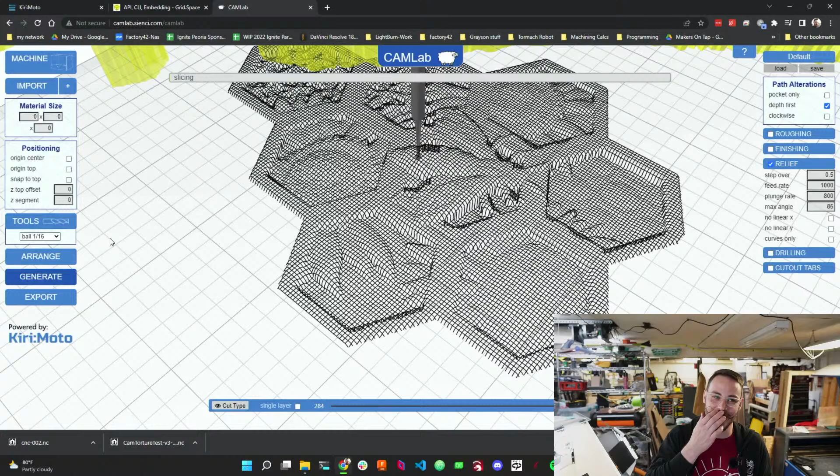Anyway, I feel like this live stream has hit its climax and is done. Kiri Moto part.

Just like a quick aside, if I was going to try to use this to make real parts and I was really trying to fight this stuff and make it work, what I would probably do is process models. Like, bring in a model that only had the text, etch the text. Bring in a model that had no text and only had the things I wanted to go in and out, just to simplify the operations and make it so the software was a little less confused on what I wanted it to do.

I feel like that would be the way around a lot of this. Sure, it's complex and annoying, but it would work. It would make a good part.

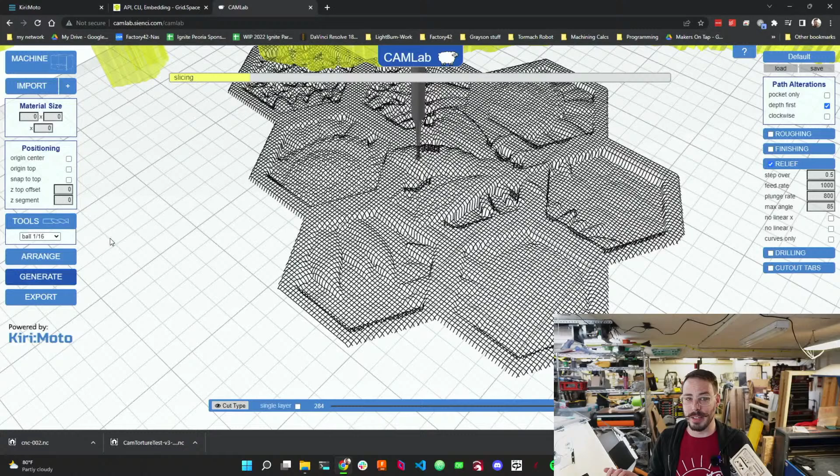And, you know, if you need free browser-based CAM, this worked. It worked so much better than I thought it would. Yeah, they made a good tool that does everything, right?

Ooh, it did something. I can't tell if those are... oh no, that's just a really nice mesh representation. Wait, oh, it's doing stuff again. I don't know, maybe I'll post a screenshot in one of the many Discords I'm in if it does something cool.

I think this is the longest 'goodbye' I've ever done on a livestream. Yeah, those are my final thoughts on Kiri Moto. It works with some caveats, just like FreeCAD, but it's free, and they made some huge strides in making a really cool CAM tool. It wouldn't be my first choice, but it wouldn't be my last now. So that's kind of where I've landed with it.

This progress bar keeps giving me hope. Anyway, I'm gonna go do something else now.